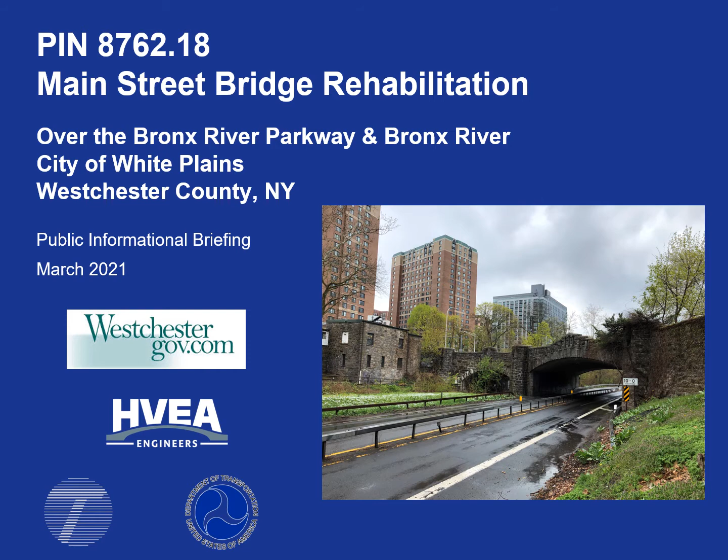We will first introduce the project team, then discuss the purpose for this briefing, how to provide us with any comments or questions you may have, then take you through the details of the project, such as location, background, objectives, needs, challenges, process, and anticipated schedule.

This project is being undertaken by the Westchester County Department of Public Works and Transportation, led by Commissioner Hugh J. Greechan Jr., and supported by Robert S. Donnelly and Kevin Roseman.

The county has selected the consultant engineering firm of HVEA Engineers to complete the design of this project. Our firm is based in Beacon, New York, and is supported by staff in our Rockland County location in Chestnut Ridge.

The purpose of this briefing is to make the public aware of this project and solicit comments and questions that you may have. Due to the COVID-19 pandemic, we are presenting in an online format. A public presentation of the project is also a requirement of receiving federal funding for this project. We hope to provide everyone with an understanding of what will take place and get a sense of the concerns that you may have.

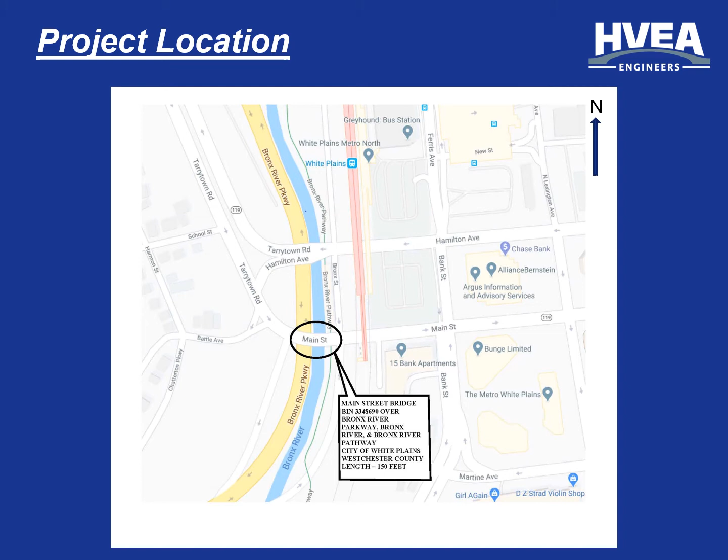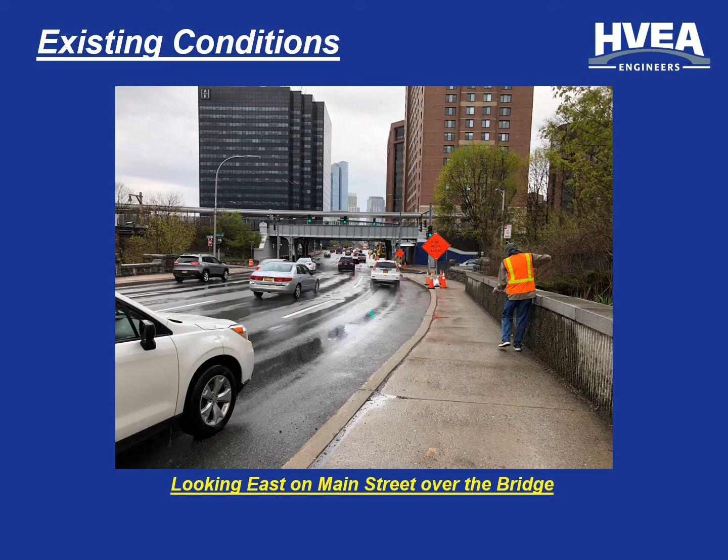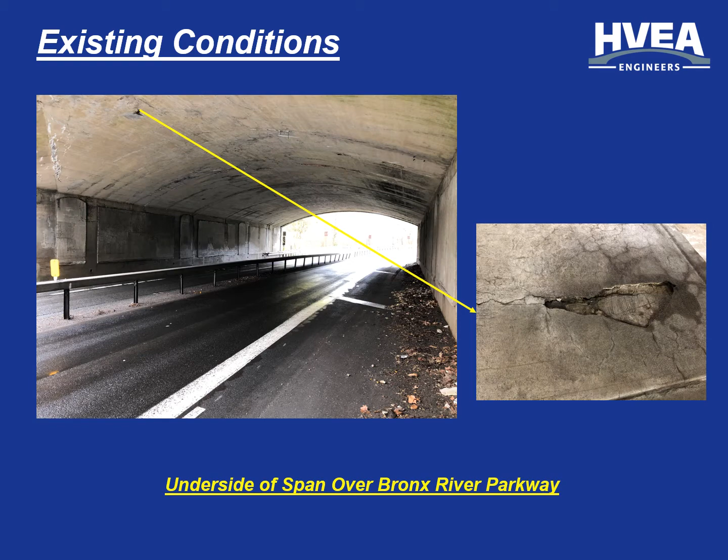Here's a view of the underside of the span over the Bronx River Parkway. This span is a stone-faced concrete arch. Here you can see the concrete start to crack and spall in the zoomed-in view to your right. This condition is typical for the underside of this span.

Here's another view of the underside of the span over the Bronx River Parkway. You can see numerous cracks on the underside of the structure, largely a result of water seeping through and freeze-thaw cycles.

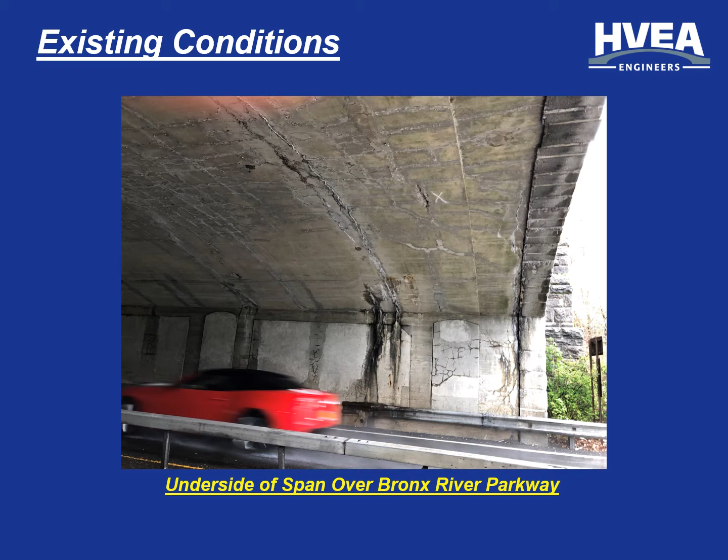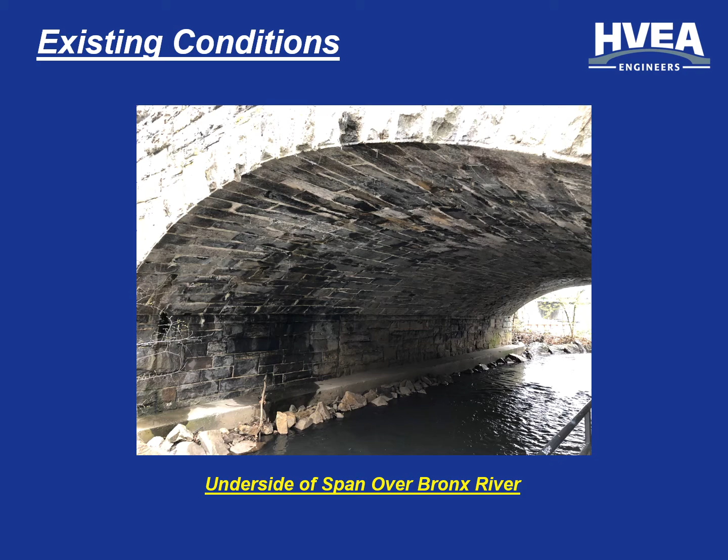Here's a view of the underside of the span over the Bronx River. This span is a masonry arch. Note the water seepage on this span as well. Here's another view of the underside of the span over the Bronx River, showing the Bronx River pathway.

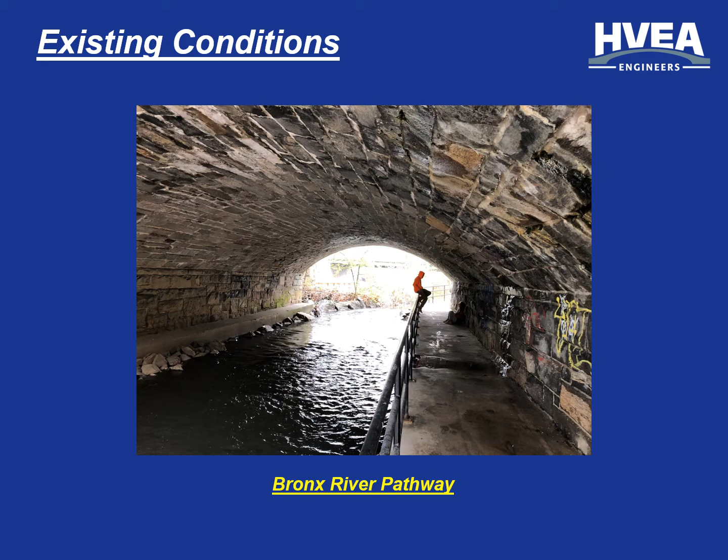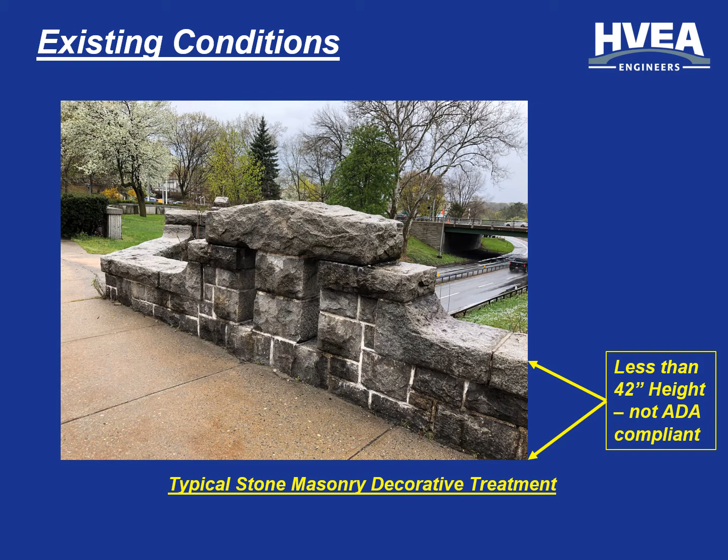The project came to be when the Westchester County Department of Public Works and Transportation determined that the existing structure is deteriorating and in poor condition. Work performed in 1991 to rehabilitate the bridge has now reached the end of its useful life.

The county applied for funding to perform a bridge rehabilitation through the Bridge New York program and received $5 million. Bridge New York is an initiative that is overseen by New York State DOT to provide municipalities with much needed funding to repair or replace critical bridges and culverts.

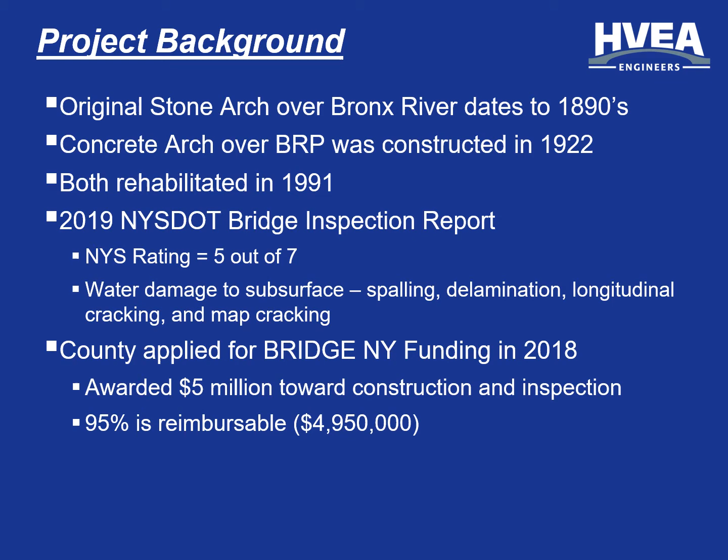As a result of receiving this funding, the project must adhere to all New York State DOT specifications and design manuals. The intention of the project is to rehabilitate the bridge to mitigate any current and future damage from water infiltration. As noted earlier, the project proposes to raise the existing stone parapet walls to comply with ADA standards and replace existing or add guide rail where it is either deteriorated, out of date, or missing.

This bridge is listed on the National Register of Historic Places. We have been working with the State Historic Preservation Office and County Historic Preservation Advisory Committee to preserve the historic integrity of the bridge. Finally, we recognize the importance of balancing the construction duration with impact to the traveling public, particularly with this project, and are working with the county to minimize the impact.

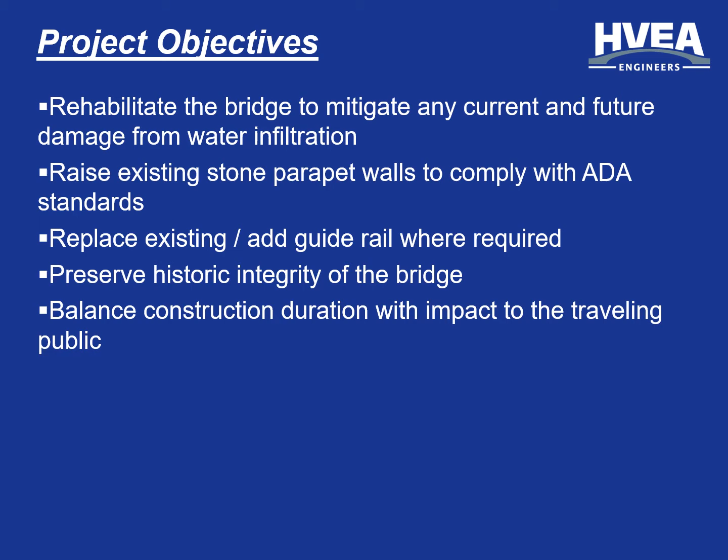Bridge New York projects are required to use New York State DOT standards and specifications, such as the New York State Bridge Manual and Highway Design Manual. Public right-of-way accessibility guidelines will be implemented and existing features will be brought up to standard.

To date, HVEA has performed several preliminary design tasks, from topography and property boundary survey to gathering existing utility information. We have also performed environmental and cultural investigations to satisfy New York State DOT requirements. The U.S. Coast Guard has been notified about the project and will be reviewing the plan since the Bronx River is considered a navigable waterway.

Traffic counts were taken and accident data was reviewed. All information has been gathered to form a draft design report, which was recently submitted to New York State DOT for review.

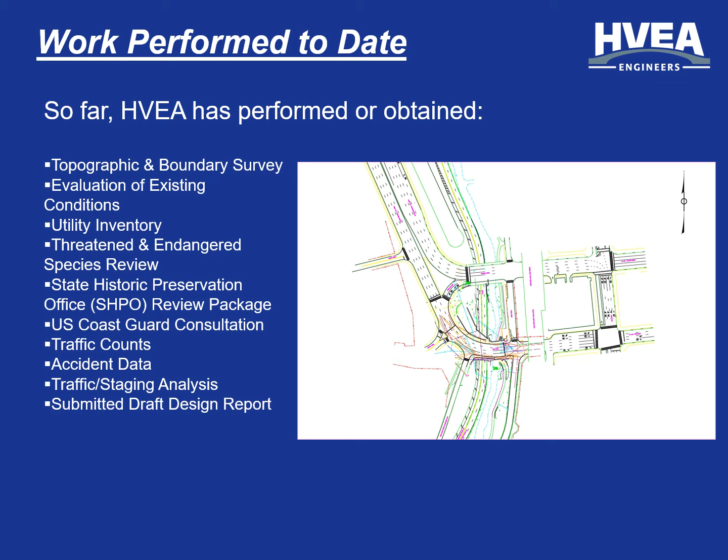Multiple agencies will have an opportunity to provide feedback on the project. HVEA will continue to consult with these agencies for approvals under the National Environmental Policy Act. The county has declared this project a SEQR Type 2, which is typical of rehabilitating existing bridges. Therefore, there will be no adverse environmental impact. New York State DOT acts as an interface for municipalities to ensure compliance with national and state regulations.

The biggest challenge will be to complete the project in a timely fashion in order to minimize disruption to the daily commuters and area residents that use the Main Street Bridge every day. Work zone traffic control will be discussed in further detail on a later slide.

The tight project area is a challenge due to limited physical space to work, store equipment, and materials. We are also working over the Bronx River Parkway, river, and pathway below. Many utilities cross the bridge as noted here.

Water seepage is the greatest contributor to the deterioration of the bridge over time. Therefore, it will be important to capture and remove as much water below the roadway surface as possible. This includes removing all material above the arches, applying waterproofing treatments, and replacing with well-draining fill and a new pavement surface. Lastly, it will be necessary to maintain the historic integrity of the original bridge while also repairing it and making upgrades to today's standards.

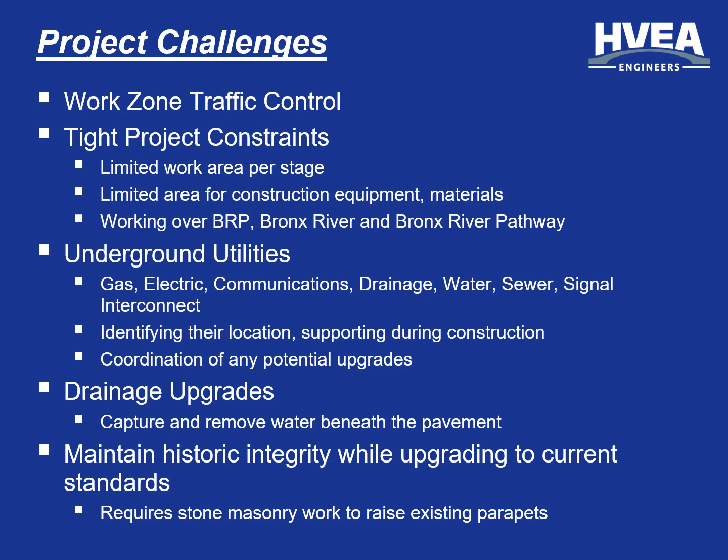The typical traffic volume for eastbound Main Street at the bridge can reach upwards of 20,000 vehicles per day. Traffic counts for this project happened to coincide with the onset of the COVID-19 pandemic in early March 2020, when only 13,800 vehicles per day were counted. For these reasons, traffic will be recounted in fall of 2021 to obtain a set of more current data reflective of existing conditions.

We also obtained all available police accident reports for a recent 3-year period to see if there are any accident problems associated with the bridge. While there were 352 total accidents accounted for over this 3-year period, most occurred due to human error and congestion of the roadway and are not directly related to the bridge itself.

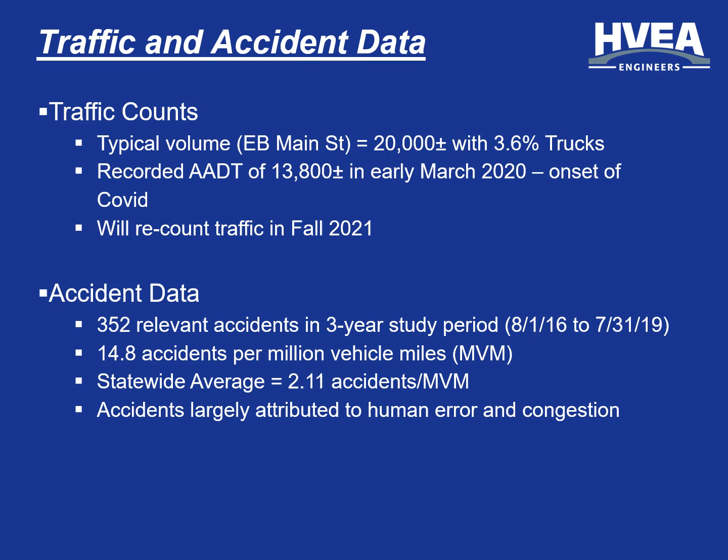It will be necessary to close lanes to perform this project. Our primary goal is to maintain 3 lanes of traffic as much as possible. One option being considered is to require that 3 lanes always be maintained during peak rush hours. A second option is to reduce traffic to 2 lanes for a duration of about 4 to 6 weeks.

While this alternative will be challenging for traffic flow, it has a number of benefits including constructability, a shorter schedule, and cost savings. The timing of the 2-lane closure also needs to occur at such a time when anticipated traffic loads are lighter, such as during the spring after a peak holiday. This option will be reassessed when more reliable traffic data is obtained in the fall.

In either case, outside of rush hour and during overnight hours when the traffic volumes are reduced, Main Street may be reduced to 2 lanes.

Lane closures will be required on the Bronx River Parkway below in order to repair the underside of the arch. The Bronx River pathway will remain open throughout construction, with overhead protection for those passing through the work area.

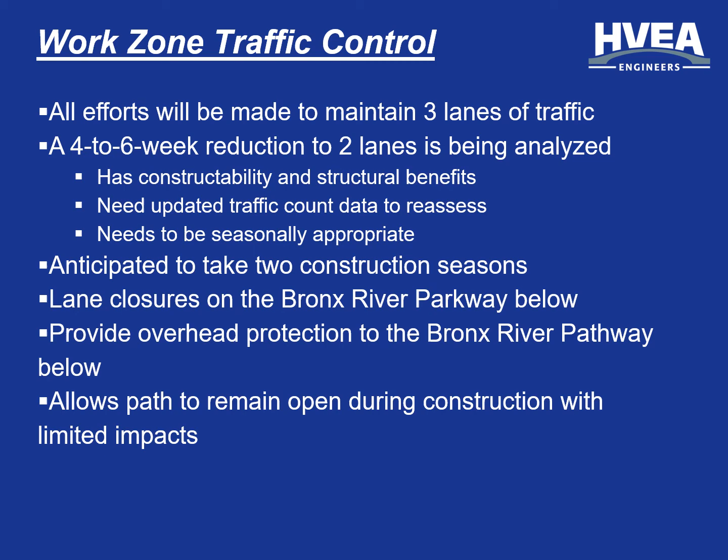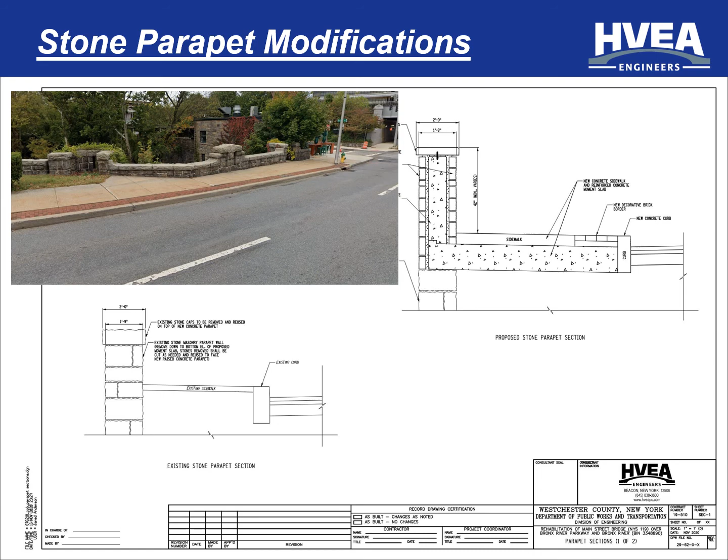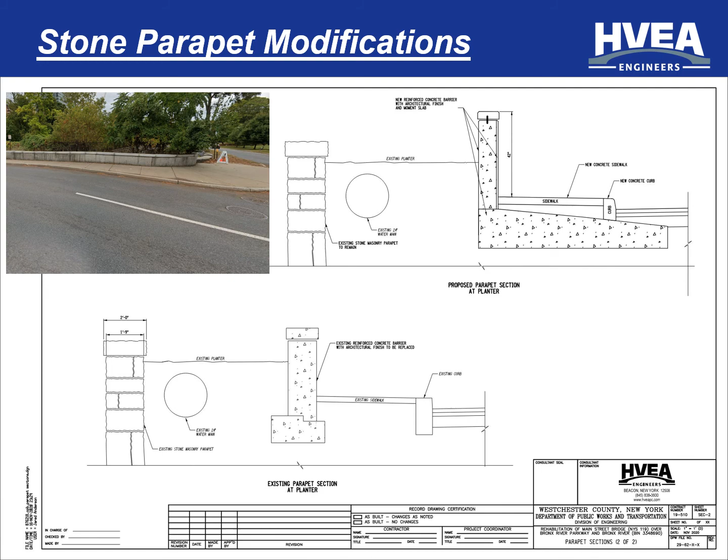As noted, our next major milestone will be to obtain approval to proceed with final design. Once we have had the opportunity to receive any comments or questions, we will compile that information into our final design report document and obtain approval to move forward with the project.

As of this presentation, the draft design report and preliminary plans have been sent to New York State DOT for review. Once comments have been received and addressed, the report will be resubmitted and design approval will be obtained. We expect to submit draft construction documents for county review by the end of August. Shortly after, draft construction documents will be submitted to DOT.

In the fall, we will take our new traffic counts and make any necessary adjustments to our work zone staging plans. The project is anticipated to be advertised for bids in December 2021, with award of the project to the lowest responsible bidder anticipated in early 2022. Construction will begin in spring 2022 and be done in the latter half of 2023.